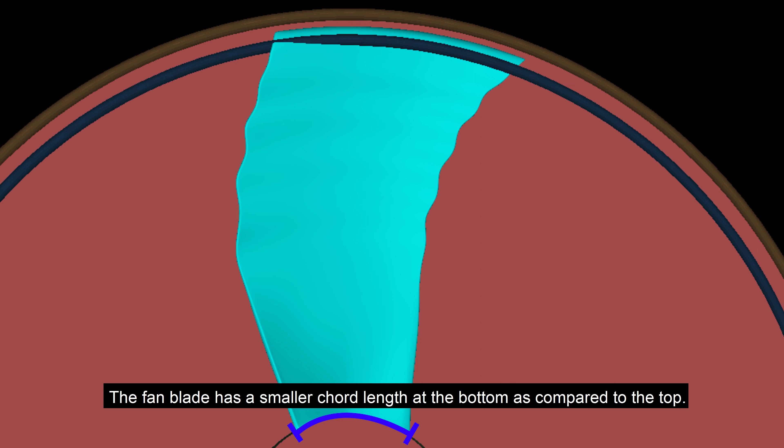Today we will mesh the entire region except for the blade tip and shroud. The fan blade has a smaller chord length at the bottom as compared to the top. There are also serrations starting from halfway through the length of the blade. Today we will discuss how we start the topology using a bottom-up approach, starting from the hub and extruding it close to the tip of the blade.

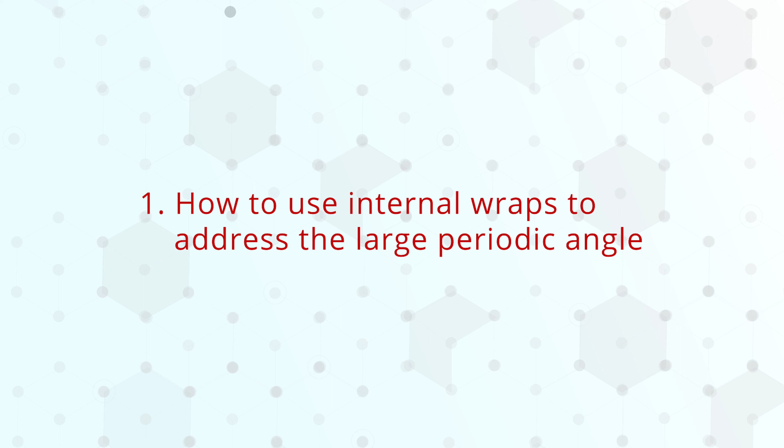In this video you will learn how to use internal wraps to address the large periodic angle, how to create a periodic grid, and how to improve the quality of the grid.

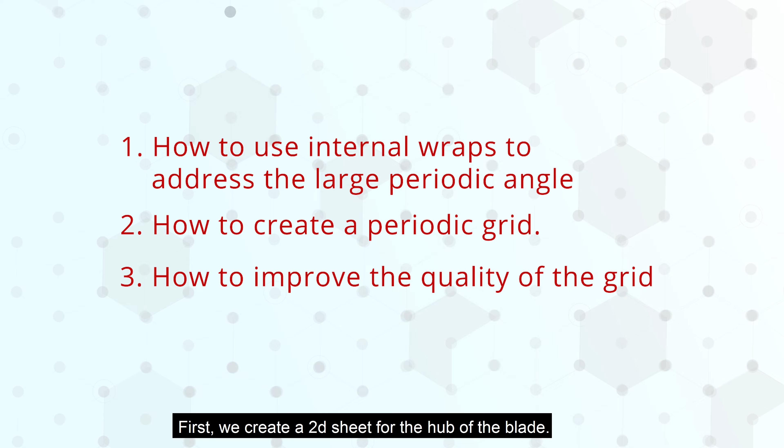First we create a 2D sheet for the hub of the blade. We need to make sure that the flow of blocks is from inlet to leading edge and from outlet to trailing edge. We assign the corners that represent the blade surface.

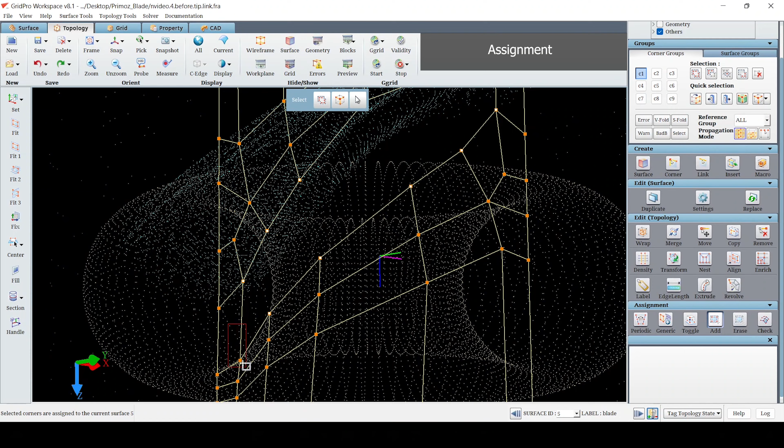Wrap the corners assigned to the blade surface.

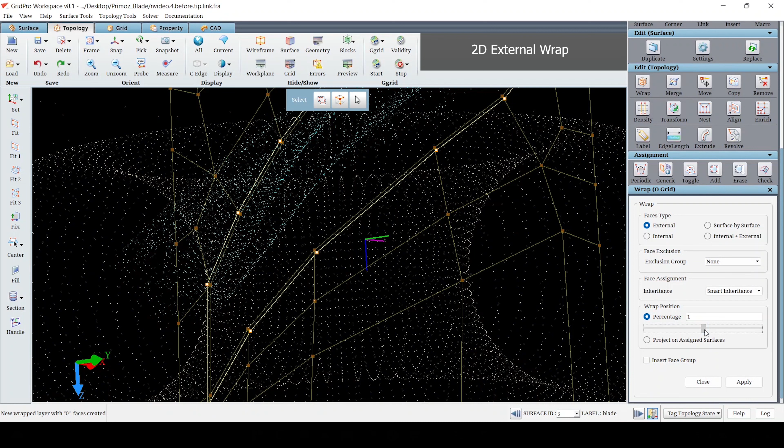We now align the sheet to the hub surface to get a curved sheet as seen.

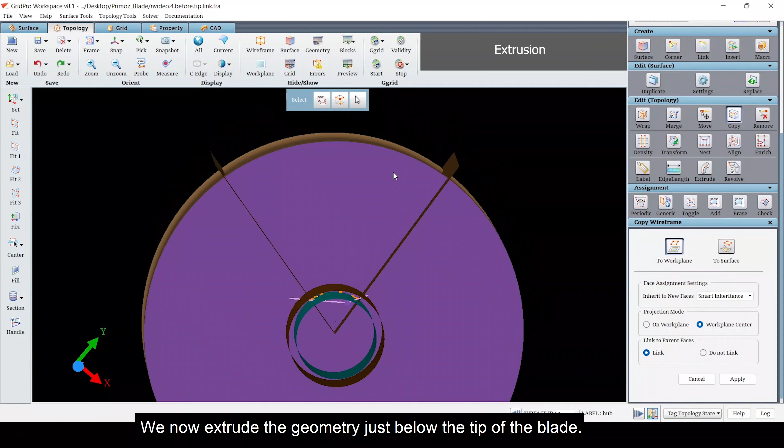We now extrude the geometry just below the tip of the blade. As the blade increases in chord length, the sheet needs to be appropriately scaled up. Make sure to select workplane center while copying the sheet. This retains the curvature of the sheet.

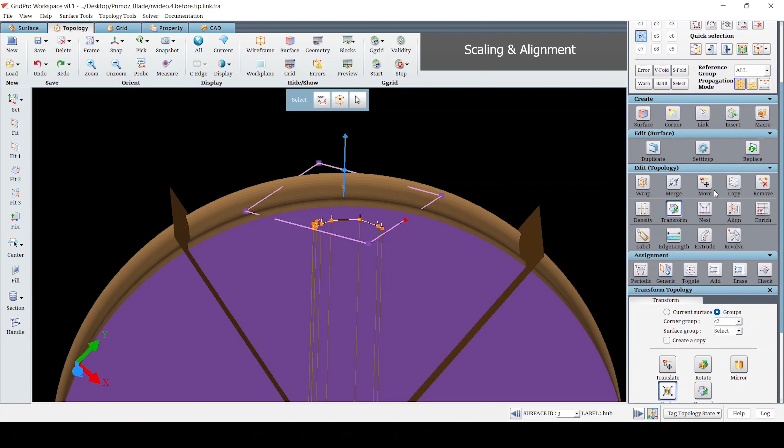The sheet may have to be manually moved back down close to the tip. This occurs because the coordinate system is not perfectly positioned with the geometry. Some corners might have to be repositioned so they do not intersect with the blade surface.

The sheet also has to be rotated as the blade rotates from the lower to upper end.

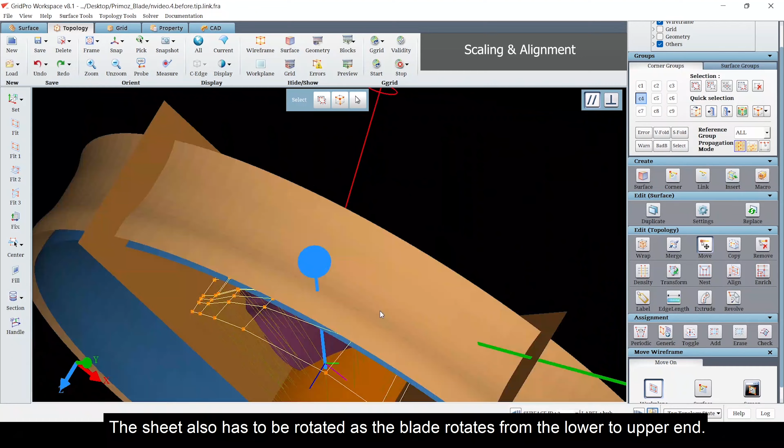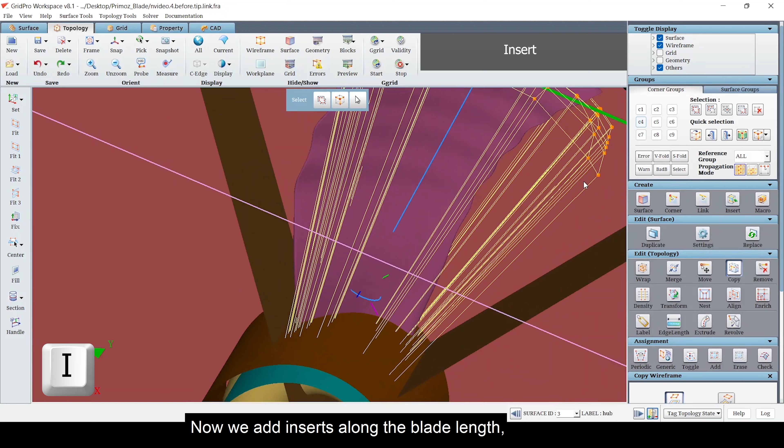Now we add inserts along the blade length and also make sure to add inserts at each crest and trough along the blade.

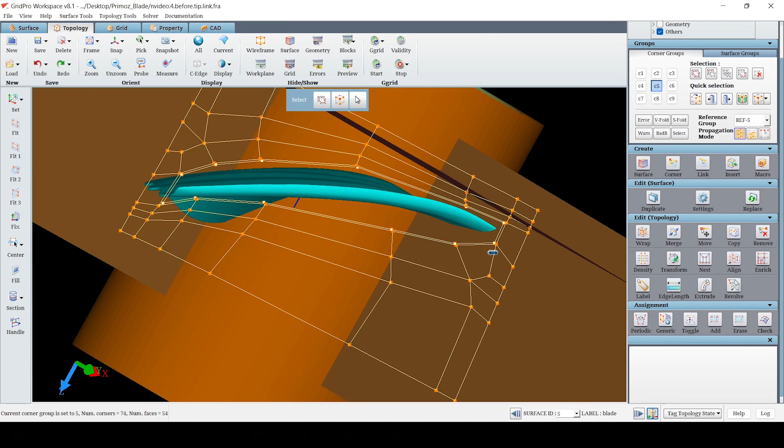We link the corresponding corners just above the tip of the blade.

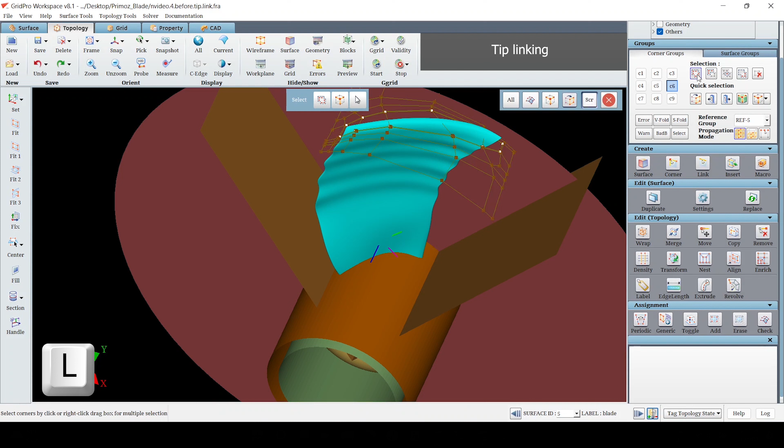Then we select the corners that are assigned to the blade surface in one of the corner groups and wrap them.

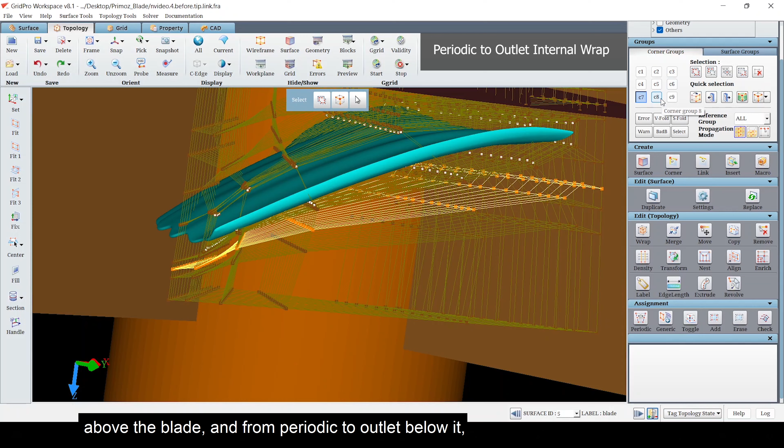According to the shape of the blade, as we want the blocks to flow from inlet to periodic above the blade and from periodic to outlet below it, we select those sheets and create an internal wrap there as well.

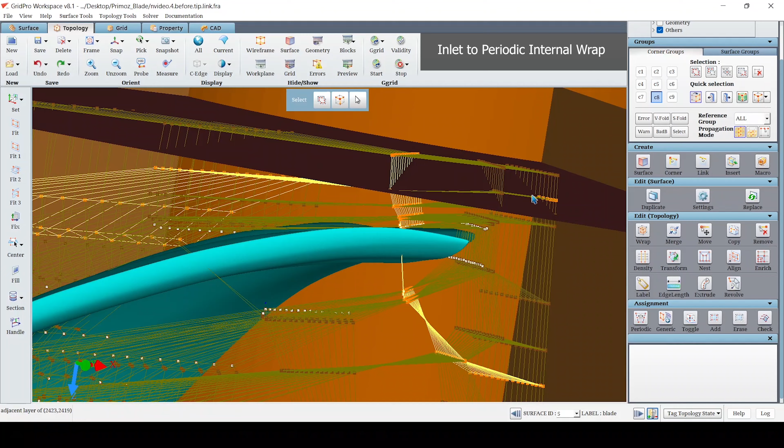To prevent high aspect ratio cells at the periodic surface close to the shroud, we need to create an internal wrap through a sheet in the middle of the geometry.

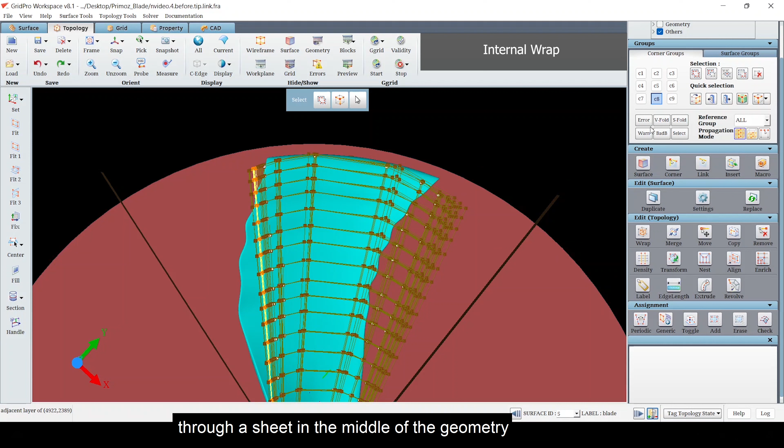We might need to add an insert before the last sheet at either periodic, as the sheet which is to be wrapped must neither be assigned to the blade nor must it be assigned to the periodic surface.

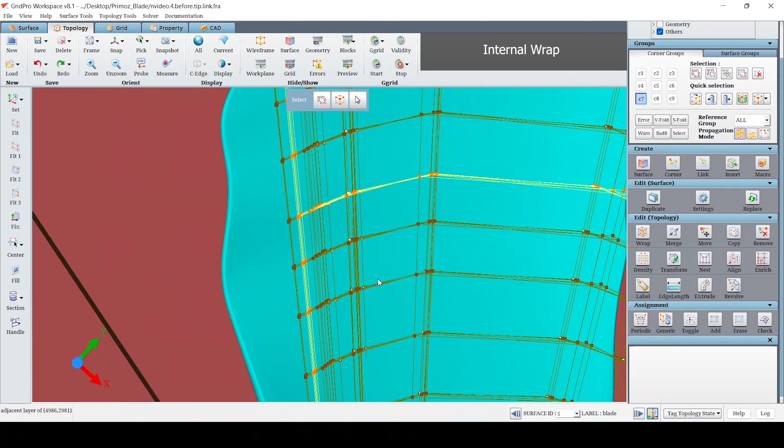Now we will assign the sheet of corners to the duplicate shroud surface that is present close to the tip of the blade.

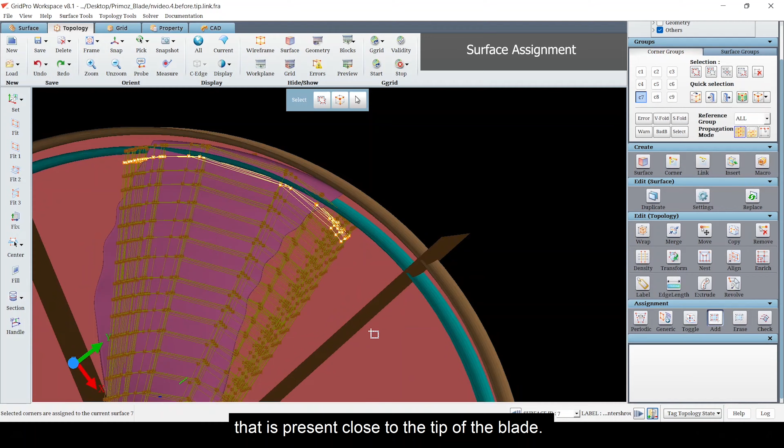We assign all the other surfaces as well, that is the hub, the inlet and the outlet, and the periodics.

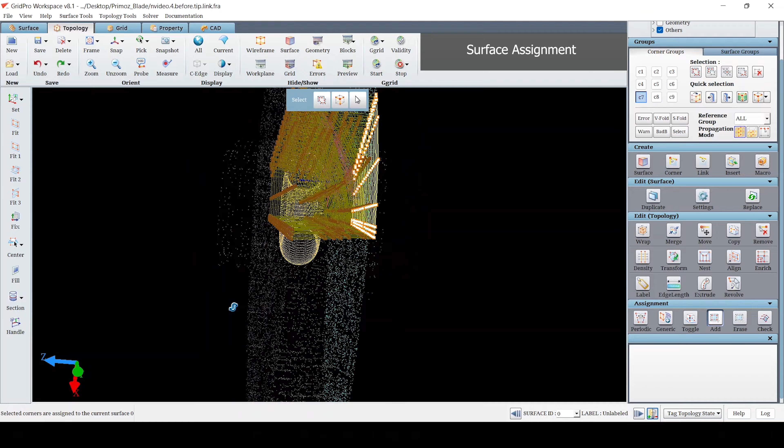The periodic assignment can only be done if the number of faces and edge densities on the left and rightmost sheets match. Open the periodic tab under Assignments. GridPro will automatically detect the pair of sheets if everything is correct. If a pair is not detected, it would mean that the number of faces on either sheet do not match.

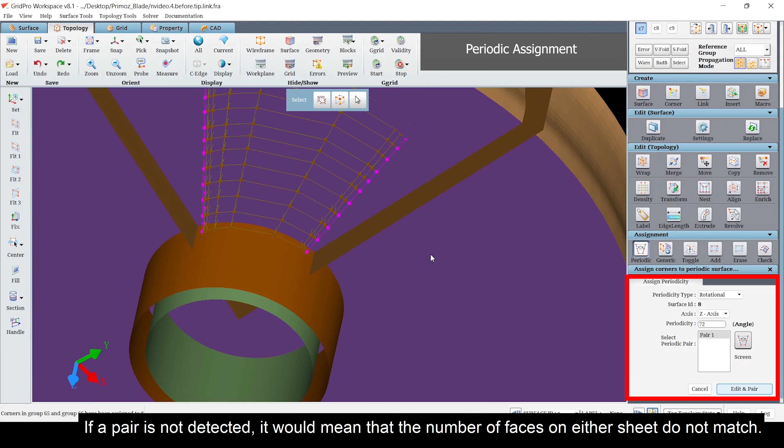The case is a rotational periodic case, and the inputs are given in the window as shown.

We now delete the sheets that lie above the duplicate shroud. Make sure to change the surface type to boundary.

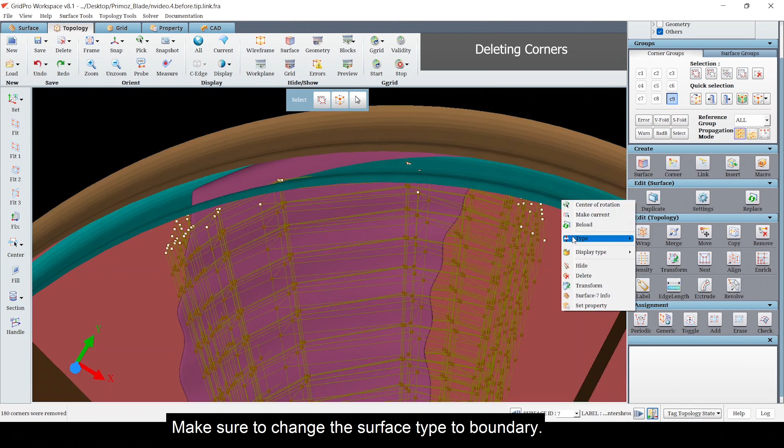To make sure that the corners assigned to the blade do not lie inside the blade surface, we use the edge length tool to move the sheets away from the blade.

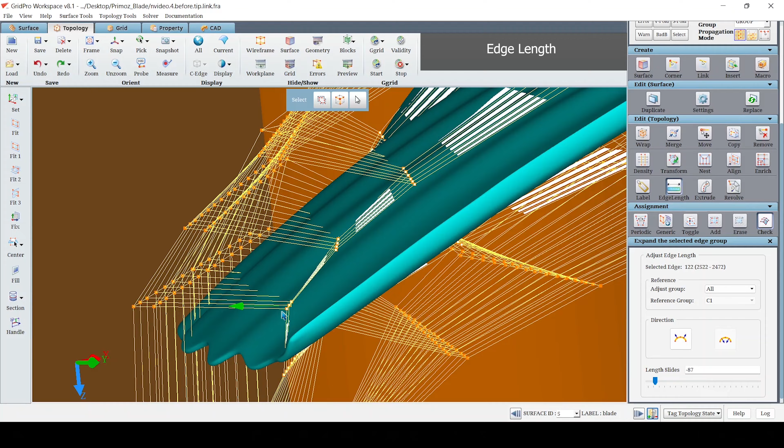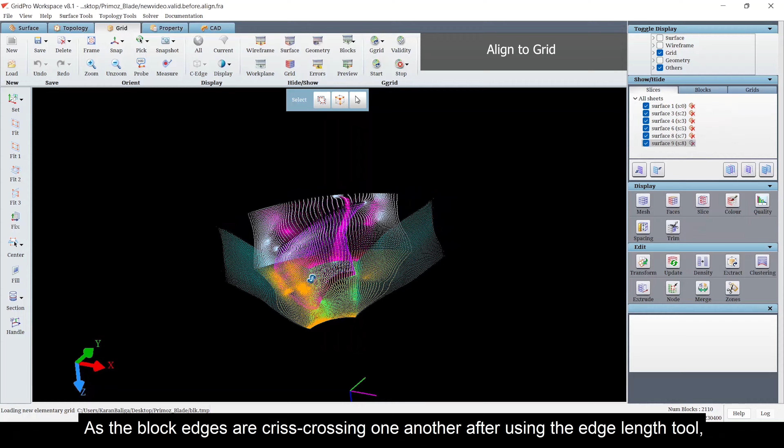As the block edges are crisscrossing on one another after using the edge length tool, we run Ggrid for a few thousand sweeps and then align the topology to the grid.

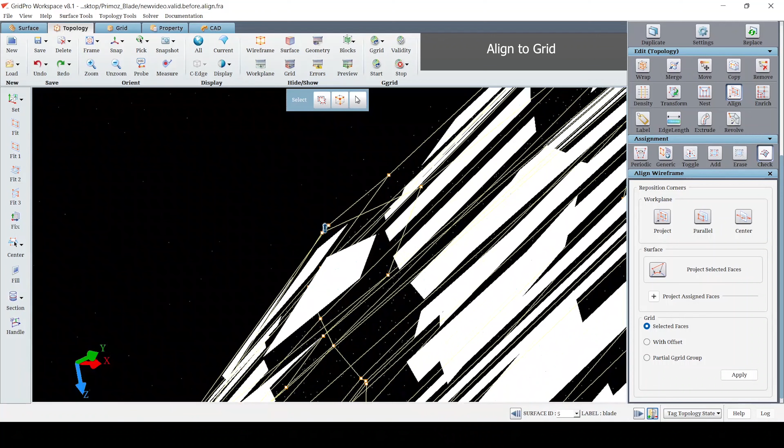The corners near the blade might have to be repositioned after aligning to the grid. I am repositioning a few corners. Similarly, the other corners can be repositioned.

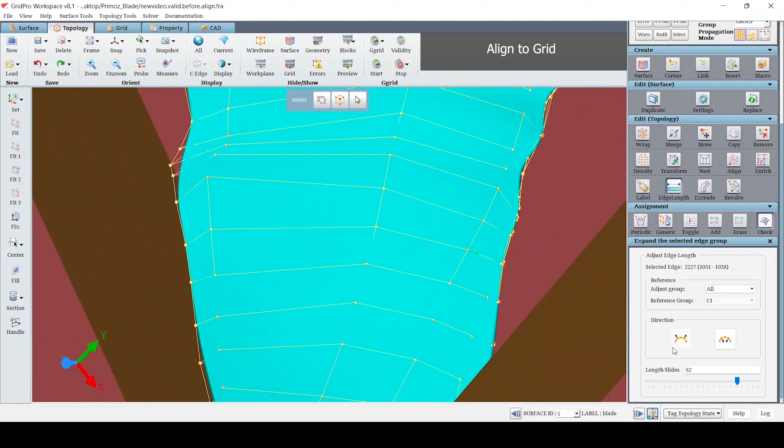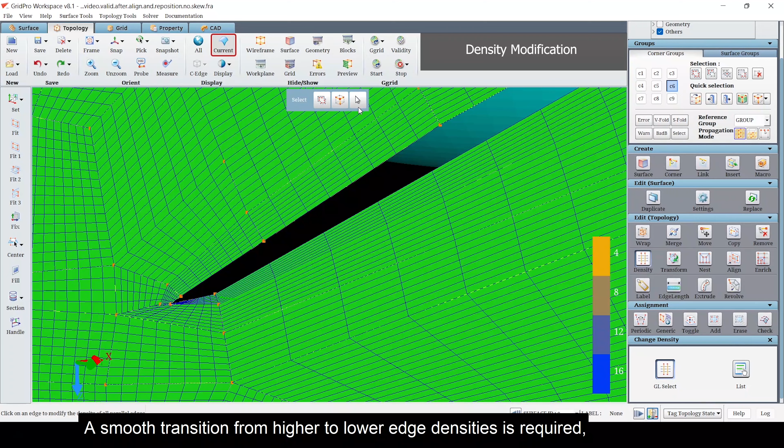The grid preview on a 2D sheet near the blade tip helps us visualize the edge densities. A smooth transition from higher to lower edge densities is required, that is, there should not be a sudden change in the size of cells on different edges. The densities on the edges are changed accordingly as shown.